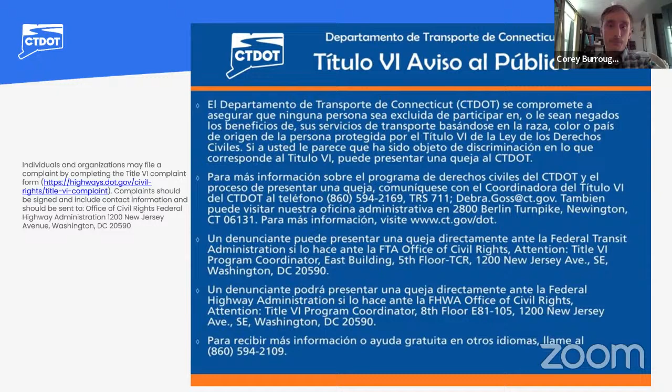Available to those joining us tonight through Zoom is the option to view captions or subtitles. To turn on this feature, select the Show Captions button or the CC button at the top of your screen. Then select the Speaking Language button and then select the desired language.

To use the Zoom Q&A function, select the Q&A tool at the bottom of the webinar window. The Q&A window will open as seen on the right. Then you can type the question in the text box and click Enter, and it will submit the question.

Questions can be submitted in multiple ways. For the quickest response, please submit questions to the Zoom Q&A as noted on the previous slide. This function will only be available during tonight's meeting. If you would like to submit your questions via email, please use the email provided: dot0092-0695@ct.gov. And lastly, if you prefer to submit your question by phone, you can call the number 860-594-2020 and leave a voicemail. Please state your name and reference the project number as a reason for your call in the voicemail.

The project email, voicemail, and Q&A box will be screened by the project team, and the project team will then read the questions out loud. Questions may be asked at any time during the presentation, but they will be answered at the end. There's also a project webpage where a recording of tonight's meeting will be made available, along with information on how to leave questions and comments for the project team. That website is http://ct.gov/DOT New Haven 92-695. The question and comment period by email or phone will be open through July 9th for questions or comments after tonight's meeting.

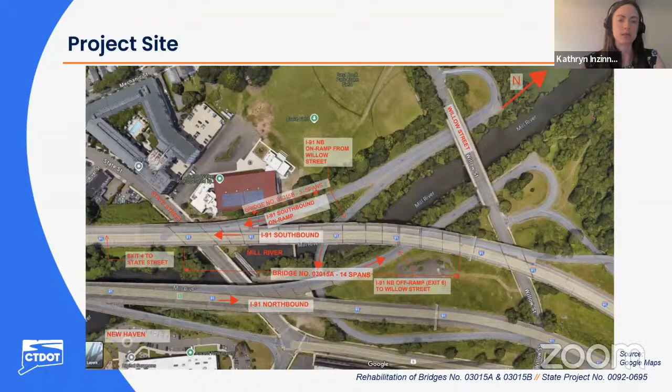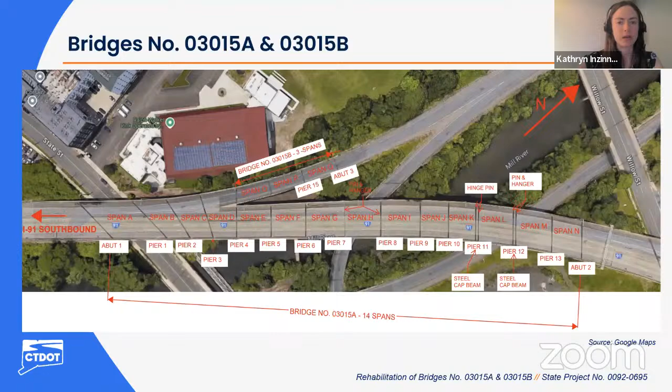Here's a project aerial zoomed in with the span numbers for both bridges. I-91 southbound is Bridge A, which is the I-91 southbound main line, with 14 spans, span A through span N. The I-91 southbound on-ramp is Bridge B, which has 3 spans to the north, span O, P, and Q. We will cover the repair work on each span on the following slides.

The next cross-section at the top is showing span F. Next cross-section is span J for the main line.

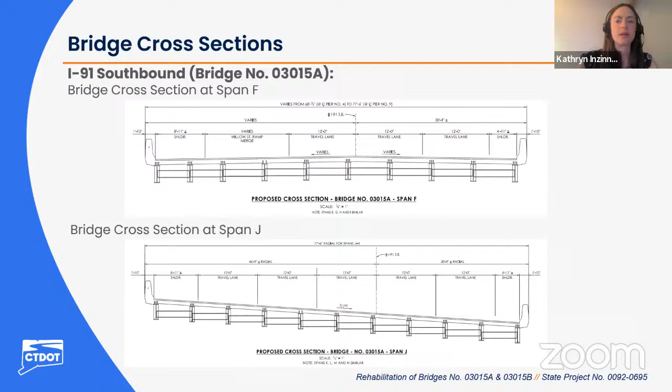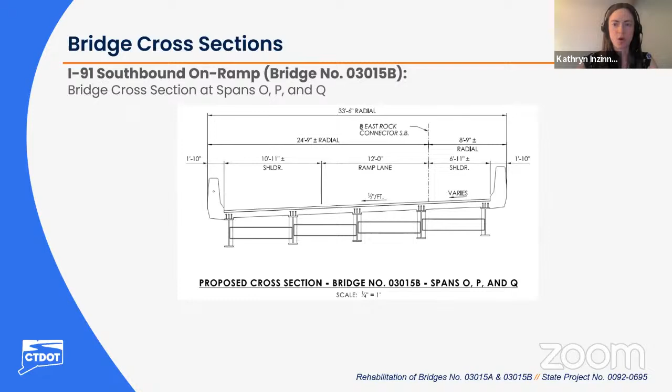Lastly, the last slide is showing the bridge cross-section for the ramp, Bridge B, which is spans O, P, and Q.

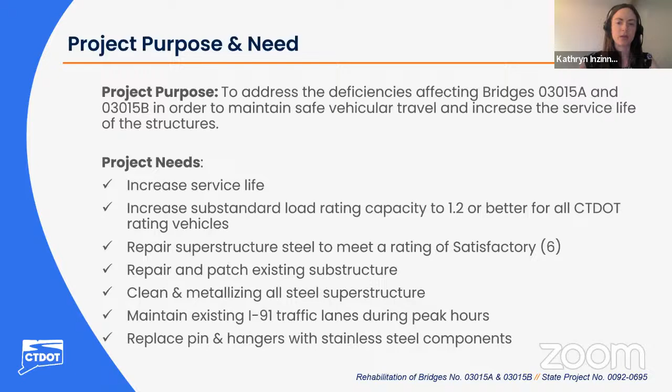The purpose of the project is to address the deficiencies affecting bridges A and B in order to maintain safe vehicular travel and increase the service life of the structures. The needs are as follows: to increase the service life, increase the substandard load rating capacity to a 1.2 or better for all Connecticut DOT rating vehicles, repair the superstructure steel to meet a condition rating of satisfactory, which is a 6, to repair and patch the existing substructure, to clean and metallize all of the steel superstructure, to maintain the existing I-91 traffic lanes during peak hours, and to replace the pin and hangers with stainless steel components.

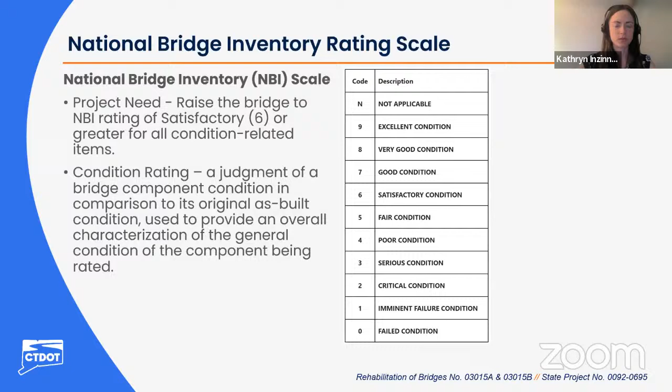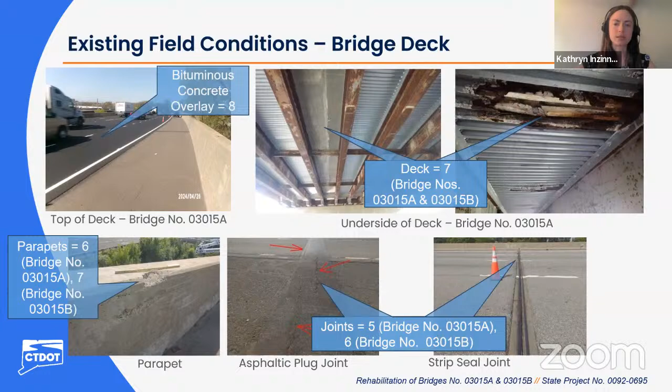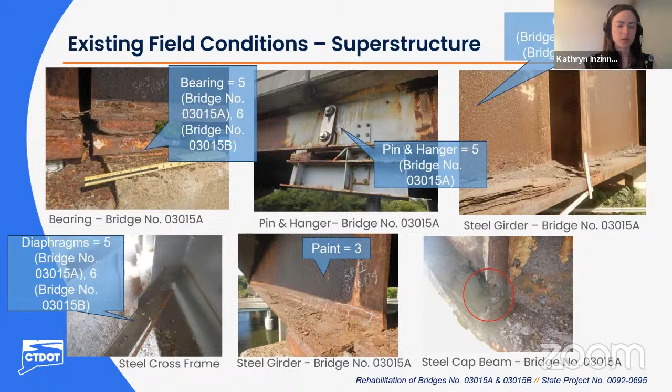This slide covers the bulk of the repairs for this project. These show some photos of the steel girders supporting the concrete deck. The condition ratings vary from a 3 for the paint system that's failed, as you could see in the bottom middle photograph, to a 5 and a 6 for the steel bearings, pin and hanger components, and girders. This project will upgrade these components to a condition rating of 6.

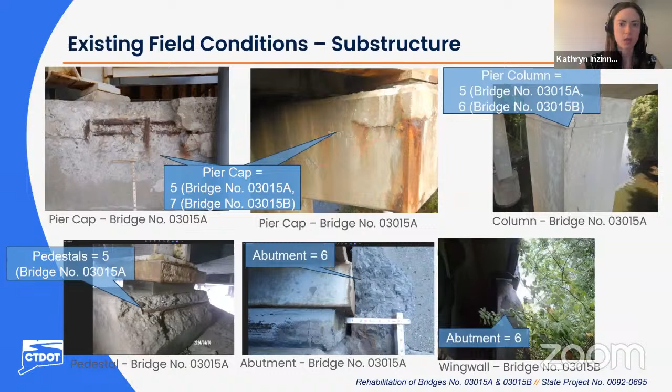Here are some photos of the substructure components. This includes the concrete abutments, which are the elements that support the end of the bridge, and the piers, which are the concrete elements that support the bridge in the middle. The substructure ratings range from a 5 to a 6 or a 7, depending on which bridge you're looking at, the ramp or the main line.

Here are some photos showing the bridge channel. One criteria that must be rated per the NBIS ratings is the channel. The various condition ratings for the channel are all above a 6. We are not planning to do any work within the channel.

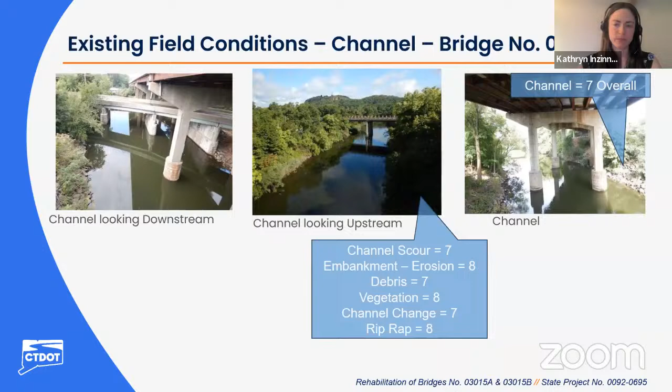This slide shows the scope of work items for the steel components. We will strengthen the structural steel members to meet the load rating requirements, repair all deteriorated steel, replace the pin and hanger and hinge assemblies, redundant supports and windlocks, clean and metallize the entire steel superstructure and steel pier caps, and also replace fixed and expansion bearings as needed, replace steel pier cap bearings.

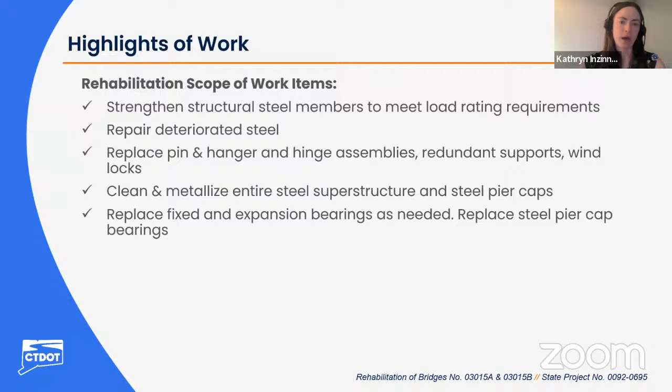This slide covers the scope of work items for the concrete components, including replacement of the deck joints, repairing the deteriorated areas of the concrete bridge deck, replacing the bituminous concrete overlay and waterproofing membrane, repairing existing parapets and barriers with concrete patching, applying the penetrating sealer protective compound on the parapets and concrete surfaces adjacent to the roadways, repairing and patching deteriorated concrete substructure elements, cleaning the scuppers, which are part of the bridge drainage system, and extending the weep pipes.

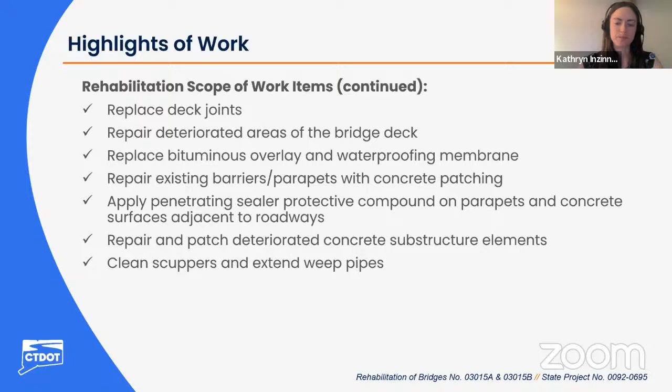This is a plan view of the second half of the I-91 southbound bridge. The rehabilitation work will be done in 3 stages on I-91 southbound, and the work for the 2 I-91 northbound ramps to and from Willow Street will be done in 2 sub-stages. Now Alex will talk about the maintenance and protection of traffic.

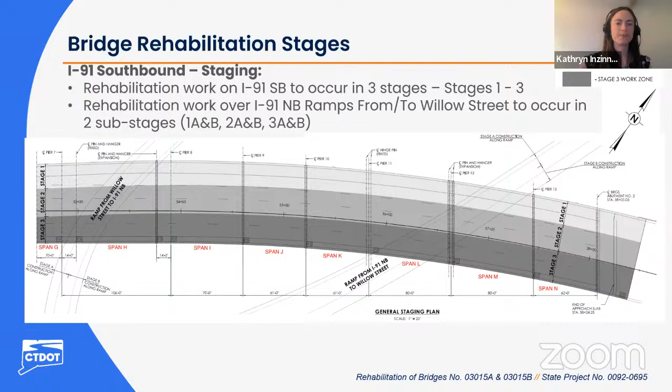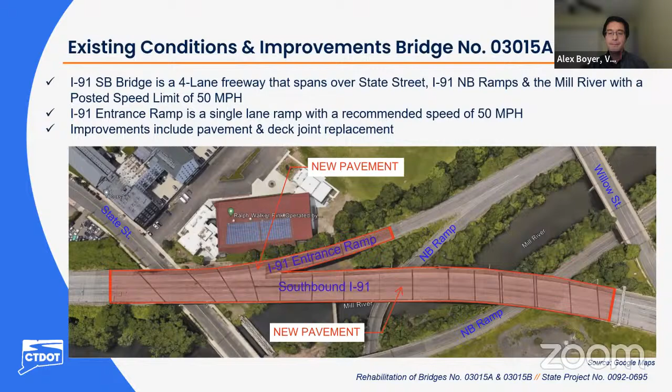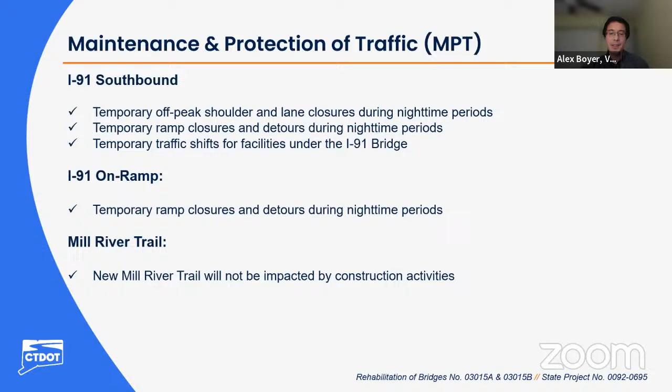Maintenance and protection of traffic, MPT. Traffic along the I-91 bridge will be maintained by temporary shoulder and lane closure during nighttime periods. This will require temporary traffic shifts and temporary ramp closures with detours. The work on I-91 entrance ramp will require ramp closures with detours during nighttime periods as well. And just to be clear, the new Mill River Trail will not be impacted by this project.

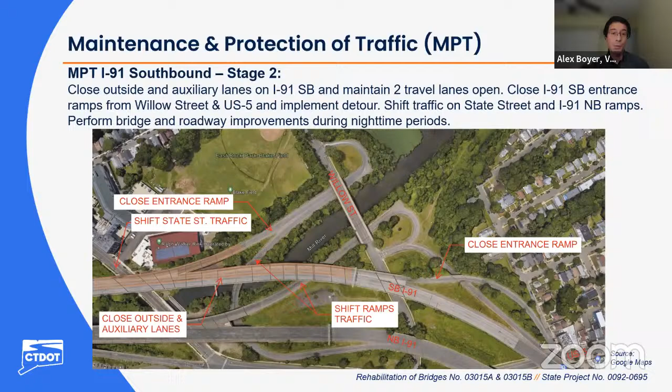This slide shows stage 2. To complete the work, I-91 outside lanes will be closed while keeping 2 lanes open. The entrance ramp from Willow Street and from US 5 will be closed and traffic will be detoured. As in the previous case, the traffic on State Street and the I-91 ramps will be shifted to either side of the road, so no traffic will run under any active bridge work.

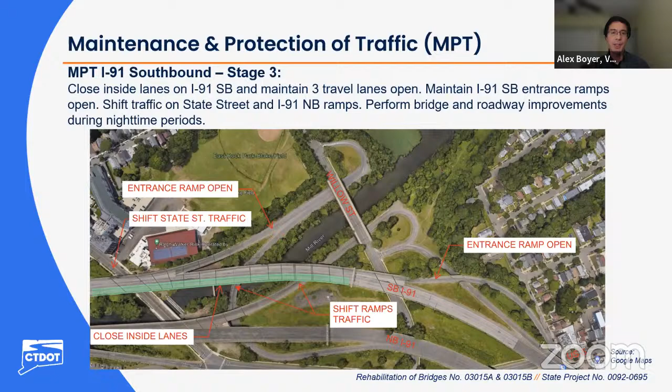This slide shows the final stage, stage 3. To complete the work, this time the I-91 inside lanes will be closed while keeping 3 lanes open. No ramp needs to be closed in this stage. And again, the traffic on State Street and the I-91 ramps will be shifted to either side of the road, so no traffic will run under any active bridge work.

These next 2 slides show a visual representation of the traffic shift along State Street and the northbound I-91 ramps. On State Street, as shown here, traffic will be shifted to either side of the road and converted to a one-way alternating traffic. This temporary traffic arrangement will occur only during nighttime periods, and at least one sidewalk will remain open at all times for pedestrian access.

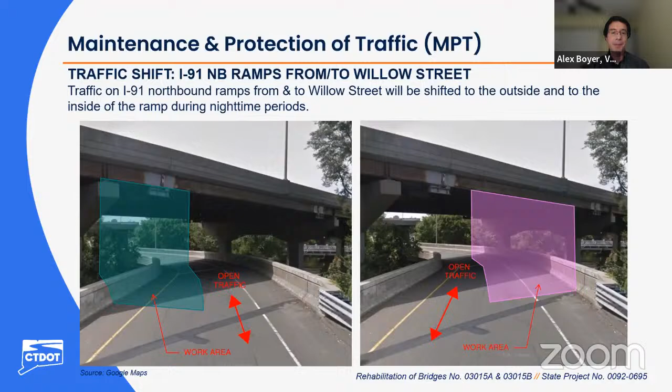The traffic along the northbound I-91 ramps, as shown here, will be shifted to either side of the ramp to allow construction workers to access the I-91 bridge from below. This temporary traffic arrangement will occur only during nighttime periods.

Detour routes: as mentioned earlier, two I-91 entrance ramps are required to be closed during nighttime periods only in order to complete the bridge work. Drivers affected by these ramp closures will be detoured using other roads.

The first detour shown here will occur when the entrance ramp from Willow Street is closed. Traffic will be redirected going west to Whitney Avenue, then south to Trumbull Street, and finally east to rejoin I-91.

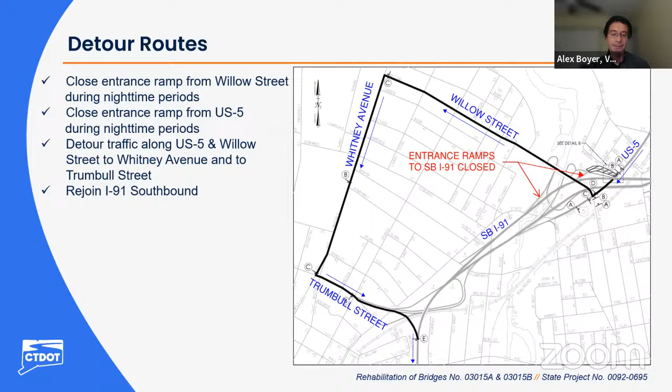The second detour will occur when both entrance ramps from Willow Street and US 5 are closed. This detour is similar to the previous one, but in this case traffic on US 5 will continue south to Willow Street, then west to Whitney Avenue, then south to Trumbull Street, and finally east to rejoin I-91.